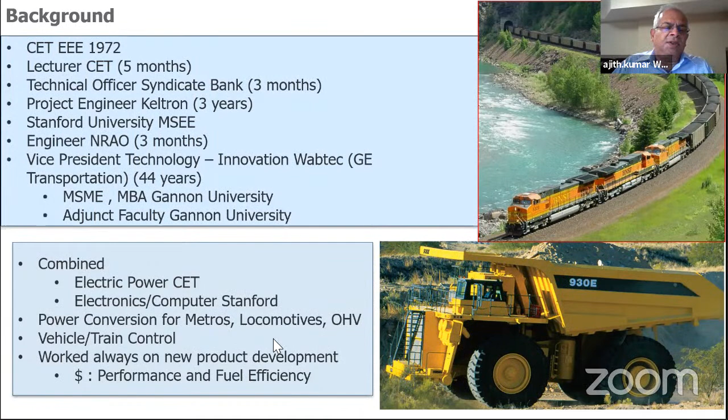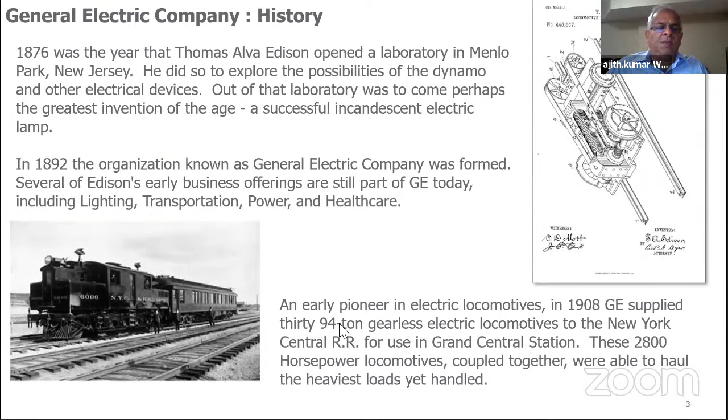Just a brief background on the history of the company. It was started by Thomas Edison more than 100 years back. This is one of his patents, on railroad equipment. You can see it's a lot different from what we know of locomotives today. GE Transportation made diesel locomotives for many, many years and electric locomotives for many, many years. When it started out, it was a very small locomotive. So in the 100 years, it has changed significantly from 1908 compared to 2015.

The weight has gone up. Most of the locomotives in the US, Brazil, and Australia, where it's used for heavy haul, are 33 tons per axle. Compared to that, in India it'll be around 20 to 25—25 is the maximum you'll see around the world, but most heavy haul is 33. So it's meant for going at low speed typically and hauling heavy trains—15,000, 20,000, up to 40,000 ton trains. The speed is limited; typically 70 is high speed actually for a freight locomotive.

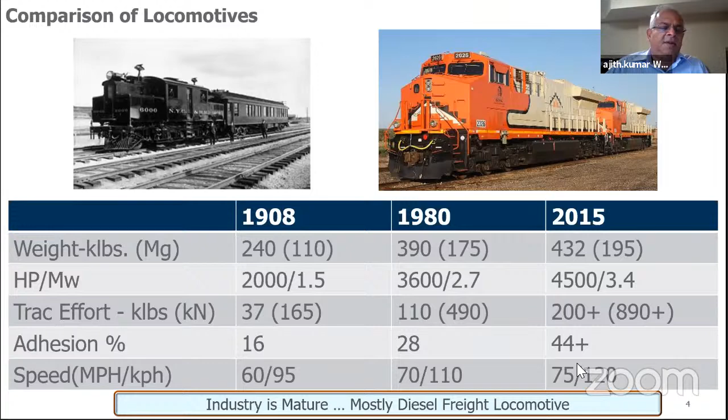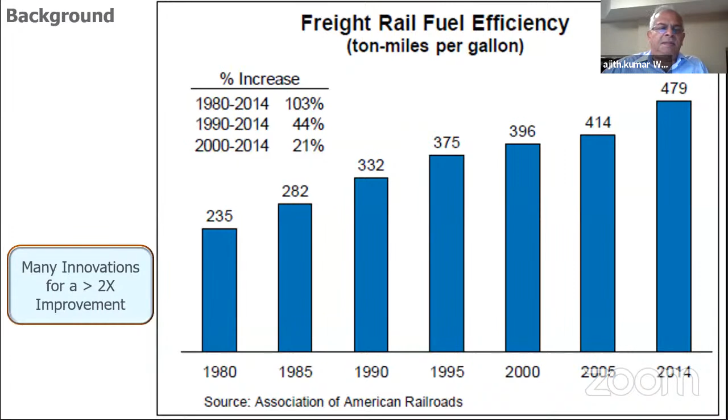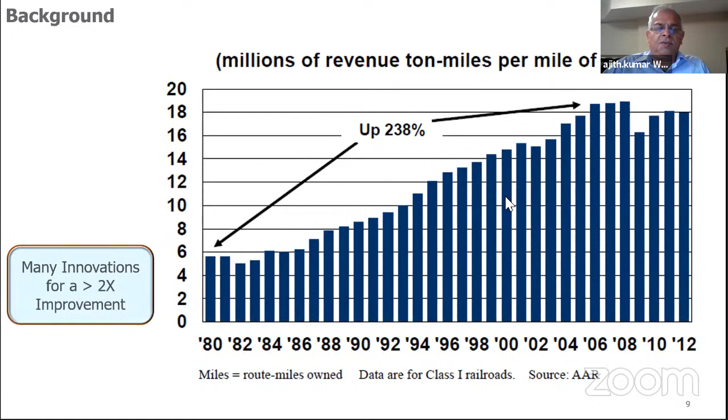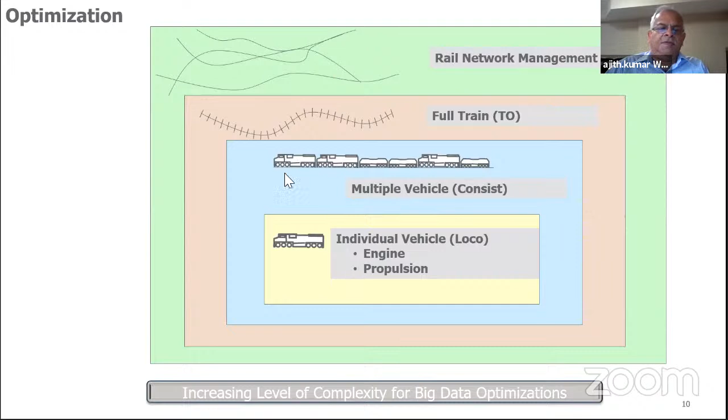For that to happen, there are many things that need to be looked at. You have to look at it from the individual locomotive: what does the engine do, what does the propulsion system do? That's where I started. Then I looked at a typical train with multiple locomotives, where you can optimize things when you have 2 or 3 locomotives. The last one I worked on was the full train itself, which needs to go from point A to B. So far I haven't gone into railroad network management itself, which involves how to dispatch trains, which trains should take priority, where they should meet and pass. I haven't looked into those. So the first three optimizations are where I concentrated mostly.

If you take a look at a locomotive or a train, a typical train is 2,000 to 45,000 tons. That's the typical train I'm used to. The biggest train is about 99,000 tons, which is a test train, not a real operating train. A typical train in the US consists of 3 to 5 locomotives, with a maximum of 7. Trains are 1 to 3 kilometers long.

This is a key metric: 0.3 to 3 kilowatts per ton. What that means is if you had a car weighing 1 ton, you're allowed to use a 300 watt drill to drive that car. That's the amount of power the train has per ton, which is very small, and that's the main reason it takes forever to accelerate or slow down a heavy haul train.

In addition, there are a lot of terrain related issues, like undulating terrain, tunnels, and curved terrain. In a tunnel like this one, the temperature goes as high as 140 to 150 degrees centigrade, so the train needs to operate through there.

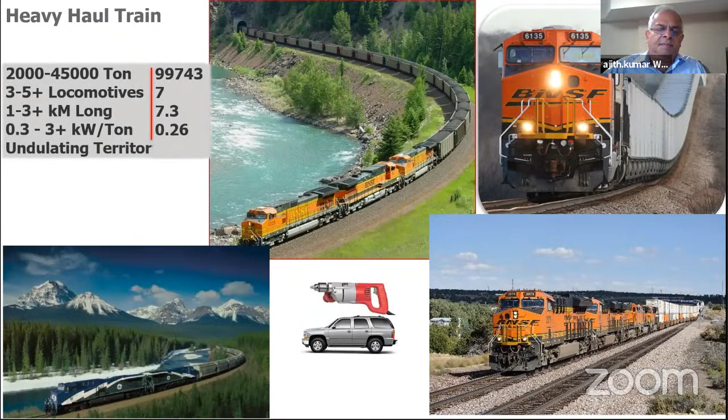These locomotives have a force about 3 to 3.5 times that of a GE jet engine at starting. At high speed it doesn't have that kind of force, but at starting it's about 3 times that of a jet engine. You can compare it with the biggest passenger car or an SUV, and look at the comparisons. It's about the size or weight of 80 full-size SUVs.

A typical locomotive consists of an engine, generally in the middle due to weight distribution, with the operator at the front, along with lots of equipment for crashworthiness. This ensures that when a train hits something, it rides on top rather than going under it, so there is lots of equipment to make sure the train does not get crushed by something else.

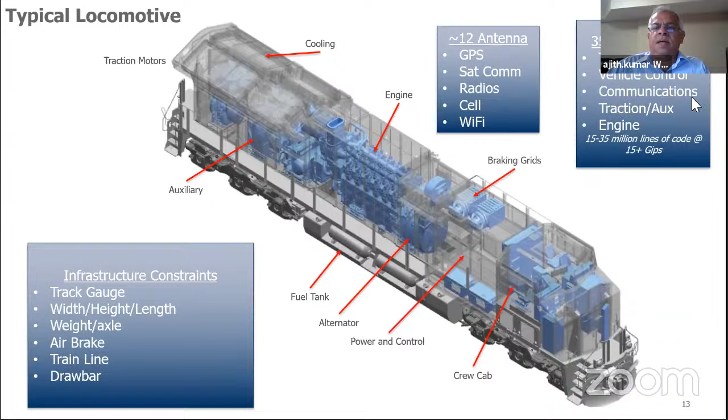And of course, radiators and controls. I won't go through all of it, but from an electronics perspective, a typical locomotive today has about 12 to 15 antennas for GPS, satellite communications, radios, cell phones, and Wi-Fi. A locomotive is always in communication with the central dispatch. For example, most GE locomotives communicate with the GE Remote Monitoring and Diagnostic Center to continuously monitor its health. There are about 35 computers, which is unbelievable, running different things from traction. That's where my expertise is, in traction mostly.

The constraint is set by tradition, meaning the distance between the rails is already fixed. In most places the tunnels are also fixed, so you cannot increase the size of a locomotive. So the space available differs by country but is limited.

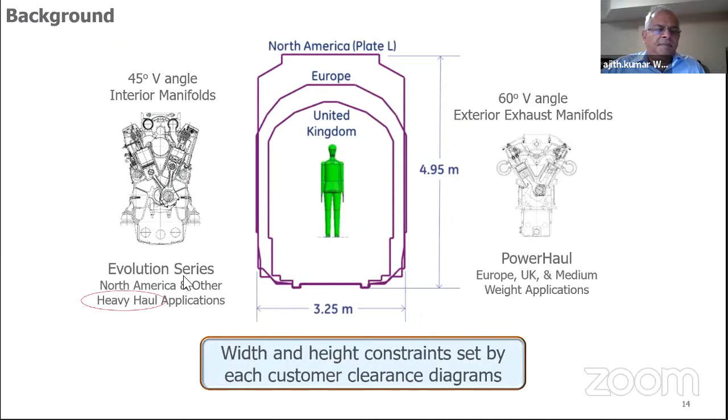I'm going to skip some charts, but when I started working on it, most locomotives, except passenger and electric locomotives, used DC propulsion equipment, which had lots of issues. One was failures due to water ingestion or snow. The other was that commutators took up a lot of space, and the most premium space in a locomotive is between the wheels because the track gauge is already fixed. So my first attempt was to take the commutator out of there and move it upstairs above the platform to get more space for power.

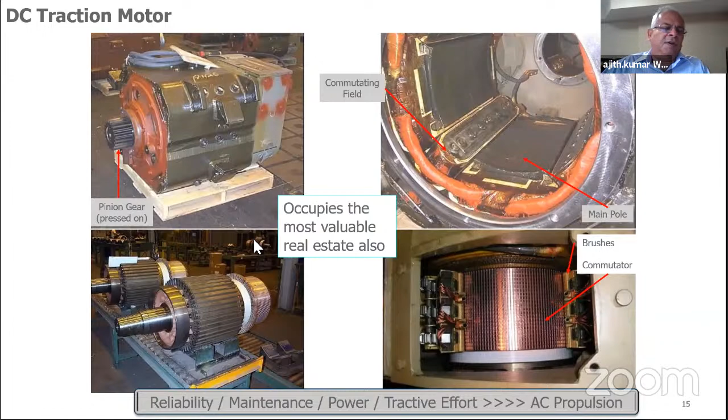And that is what's shown here. It's an AC propulsion system, which takes the power from the engine through an alternator, through a diode rectifier, through 6 traction inverters to each of the traction motors. So now the commutator is gone from underneath the platform to above the platform, which gives you a little more space for the traction motor, meaning you can put more torque, more tractive effort, or more horsepower into the rail.

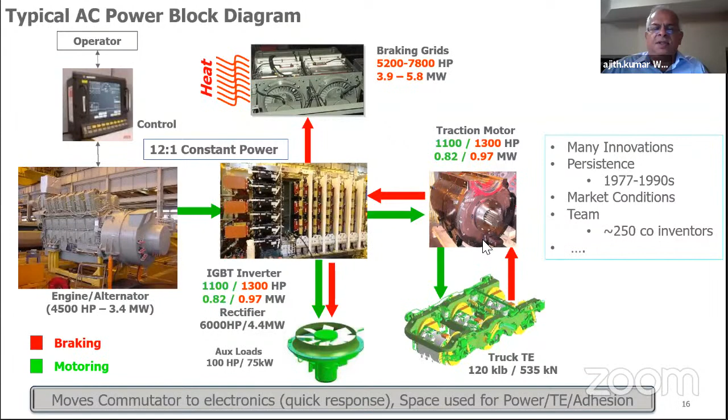So that's where I concentrated most of my time from 1977 to the 1990s. About 20 years I worked on it to get it to this shape.

So there are many things I can talk about, but I'll cover a couple of examples, like hybridization or energy recovery, some examples of how to increase the pulling power of the locomotive, and trip optimizer, which was meant for fuel efficiency, stuff like that.

A typical locomotive consumes about 4,000 liters per day, or a train will consume about 20,000 liters a day. US railroads consume about 14 billion liters per year. So these are big numbers, so any small improvement in fuel efficiency has a significant benefit to the bottom line of these railroads.

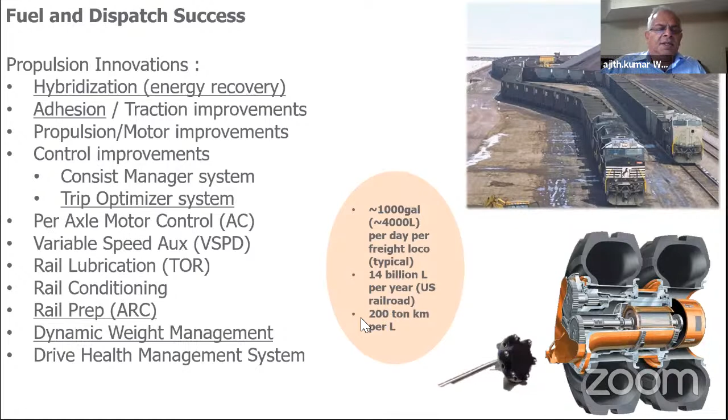So the first step was to increase the pulling capability. If you can increase the pulling capability, that means you can add more cars to the train, which means more money to the railroad. We have all seen the ideal friction coefficient, the rolling friction and static friction.

The static friction of steel on steel is about 0.65, but a train does not see that kind of friction due to various factors. Most of them you cannot control - meaning the manufacturer of the locomotive cannot control. It's all due to material, geometry, curvature of the railroad itself.

And there's always weather-related issues - moisture and ice, contamination, corrosion, leaves, oil, millipedes. During millipede infestation, it's slick. Most of the railroads are extremely slick, with no adhesion left.

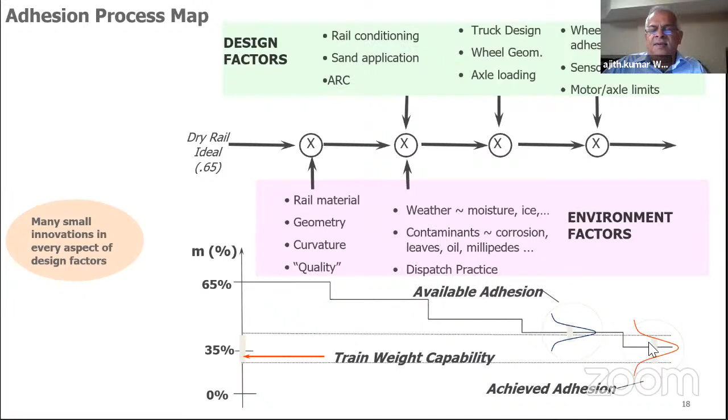And how the railroads practice their dispatch - whether they put all the locomotives in the front, the middle, or somewhere in between. So the things you can control are the ones on top. I'll talk about a couple of things, but I won't go over all of it. By the time you account for the 65% adhesion, if you can get 35%, that'll be extremely good.

And when we started looking at it, once computers came into existence, you could look at the creep. Creep is when the wheel goes at a slightly higher speed than the locomotive. A very, very slight increase in speed is all it takes to convert from static friction to rolling friction, so you lose a significant amount if you increase the speed by even a few milli-RPM.

So with computers, you can look at the speed of the locomotive and compare it with the speed of the wheel, and look at that minute difference in speed. That difference is what's used to control it to the peak of the friction force.

In school, we studied static friction and rolling friction, but it's classified as stationary or moving. But in reality, when the locomotive itself is moving, that analogy doesn't work. So we look at creep - if you are at 1 or 2% creep at high adhesion, you've lost the game.

So the objective is to find out what speed the wheel should be run at for a given locomotive speed. If the locomotive is going at 20 kilometers per hour, the wheel should be going at, say, 20.1. And what my control does is slightly adjust that speed.

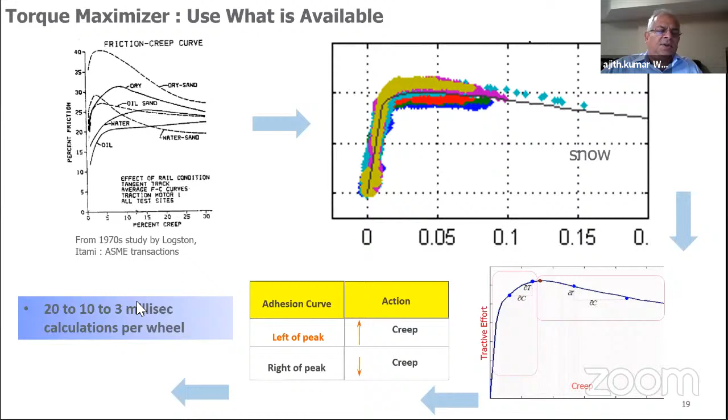So now almost every railroad uses that technique to maximize torque. And we are in the process of going even further, because the suspension of the wheel, even though we may increase torque due to the spring and mass, doesn't exactly represent the speed of the wheel. So there are techniques being incorporated using Kalman filters and observers to look at about 300 characteristics per second on the wheel itself, to minutely control the speed of the creep and increase the adhesion.

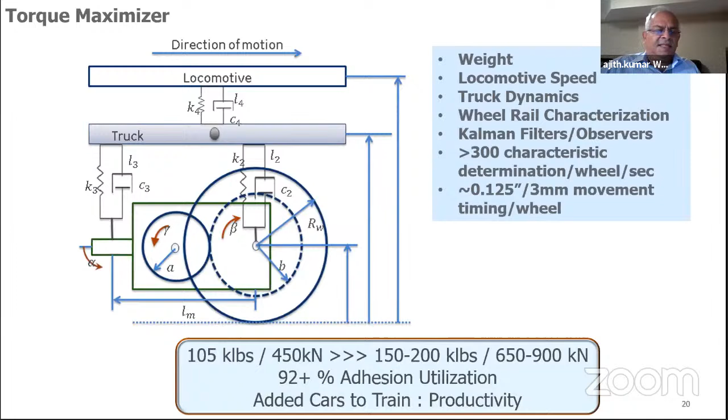So right now we make about 93% of the available adhesion under the rail, so there's 7% more left to get. The most important information you need for this control is the speed of the wheel and the speed of the locomotive itself, and there are a lot of times that is the most difficult thing to do.

GPS never tells you what the speed of anything is right now. It always tells you what the speed used to be a few seconds back, and that's too late. So most equipment does not supply the speed at the current state. There's always a transport lag.

We have looked at inertial navigation systems, which are used in missiles and other applications, but none of them provide you the speed at this instant in time. So the technique used now is that periodically one of the wheel's tractive effort is dropped, and we look at the wheel slip characteristics to figure out the locomotive speed.

Since there is no operator on these locomotives, it is crucial that we know the speed exactly. Here is an example where one of the locomotives didn't know the speed. It thought the locomotive was moving, applied adhesion, and you can see the shape of the rail after that.

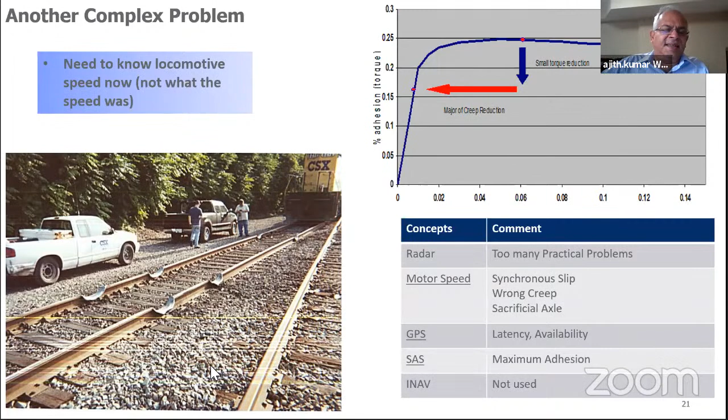It's difficult to condense all the processes I've worked on, so I'll take two examples. For some of them I have listed the patent number, so you can go and study it if anyone is interested. Most of the ones I'm going to talk about are simple, almost anybody can understand them.

The first one, as I said, is a 200-year-old problem. And if it's a problem, it's an opportunity also. So the problem is how to improve the friction between the wheel and the rail.

If you look at, for example, when you want to paint something or clean a surface before painting, that's where I started. People do sandblasting before painting to clean the surface. So the question was, why couldn't I sandblast the rail before the locomotive gets there?

So we looked at sand, we looked at silica. We took silica and pumped it at 200 kilometers per hour to the rail, just at the wheel-rail interface, with a nozzle like this, injecting silica to improve the adhesion.

We looked at walnut shells, so we put lots of walnut shells and pumped them in between. We also looked at glass beads. Today, most railroads use sand. Sand has an issue in the sense that if you ingest it, it can cause silicosis. So we are in the process of removing as much sand as possible, but most railroads still consume a huge amount of sand to improve adhesion.

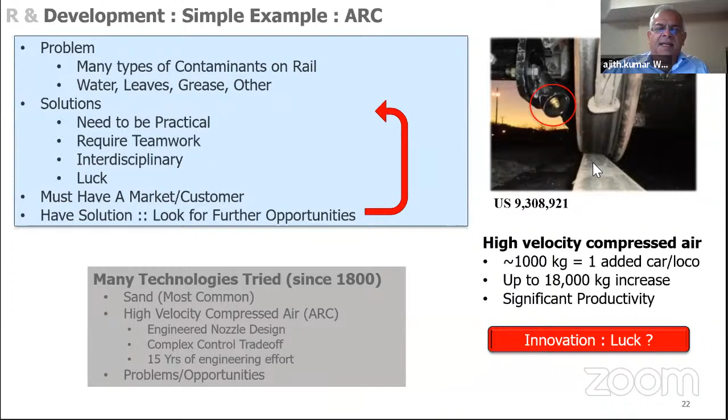In some countries, like Australia, they have used this for millipede blasting. During certain millipede infestation times, there will be lots of millipedes on the track, so the air will throw them off.

Now I want to talk about one which failed. The first one I showed was a concept which succeeded; there's another one which failed. The concept was to improve the pulling power of the train. One option, as I talked about, is to increase the adhesion in the front of the train. The other is to decrease the adhesion at the back of the train so the cars don't need as much friction.

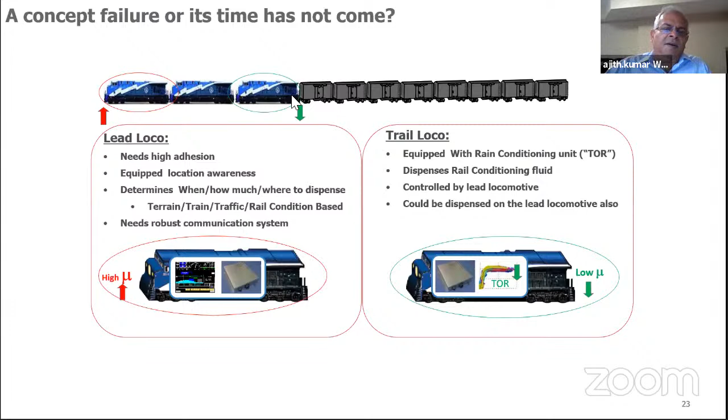So you put sand or compressed air in the front, and drops of water or ethylene glycol or any friction-reducing material behind the locomotive, which will evaporate so that the pulling required for each car is reduced. That did not succeed for commercial reasons. Technically it worked, but for commercial reasons it wouldn't, because you need to make sure that whatever you put in evaporates before the next train comes, otherwise it loses its adhesion. So for those reasons, and the amount of material that would need to be dispatched, it didn't succeed.

Another simple concept which succeeded quite well is the cost of the locomotive also matters for most of the railroads for their return on investments. So one of the concepts was to remove out of the 6 wheels, can I remove 2 of the traction motors or 2 of the propulsion systems and make the same amount of power?

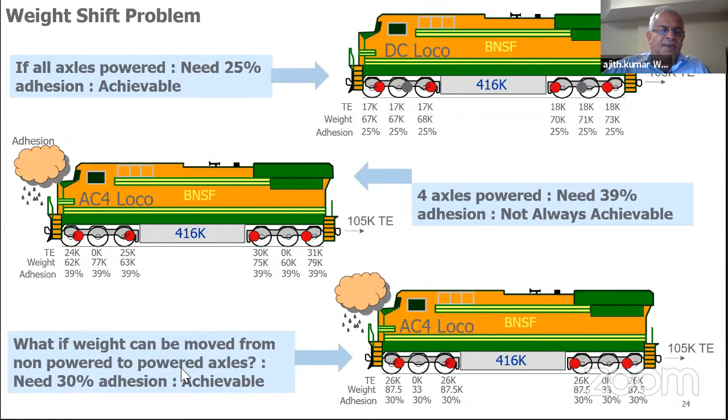As we said, adhesion is the reason why the trains don't have enough pulling capability. So the first concept in adhesion is the weight you apply on the track. The question was, can I increase the weight of the axle when I wanted it? So if I can crank this axle up and compress the spring, that means the unpowered axle's weight will be transferred to the powered axles. It's a very simple equipment, and it made enough tractive effort to sell about 1,500 locomotives.

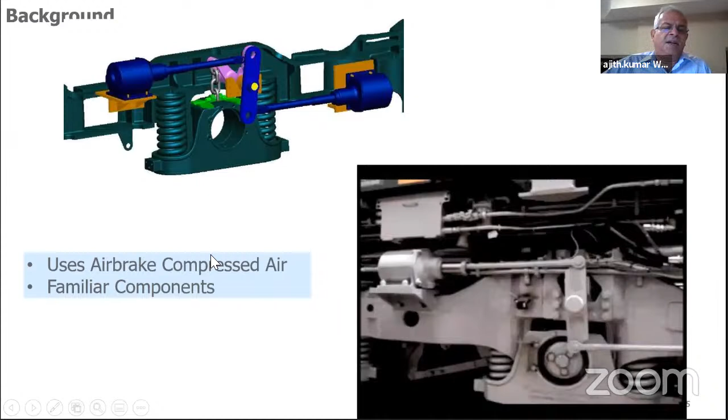So I'm going to change subjects slightly, go from locomotives to trucks. We talked about a locomotive, it's about 3.5 times the pulling capability of a jet engine. Now, if you look at a truck...

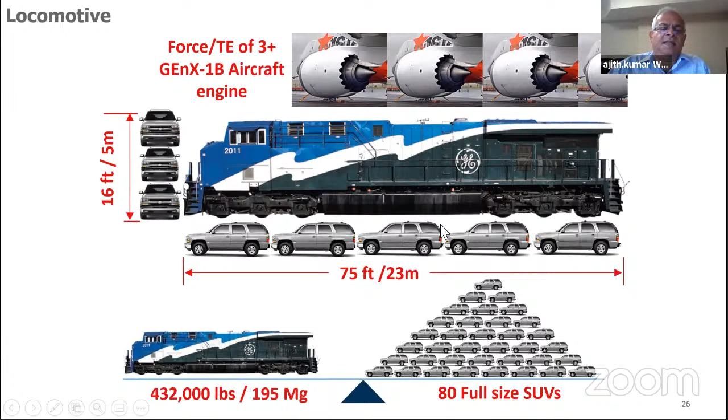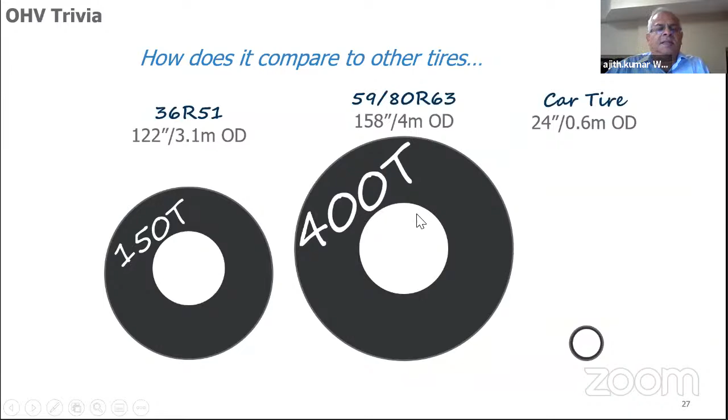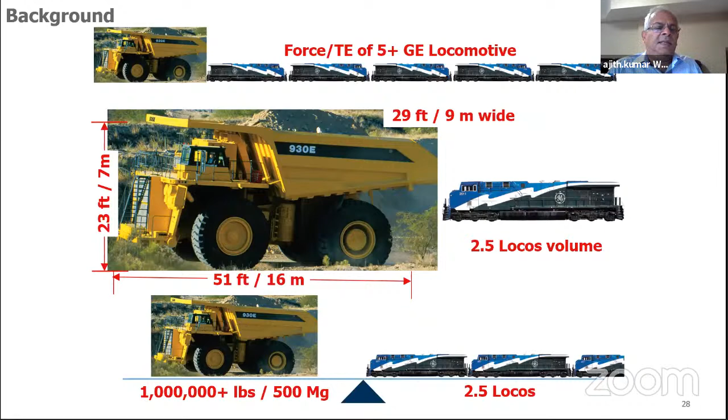I'll show you a video. I don't know if it'll work or not. If it works, we'll...

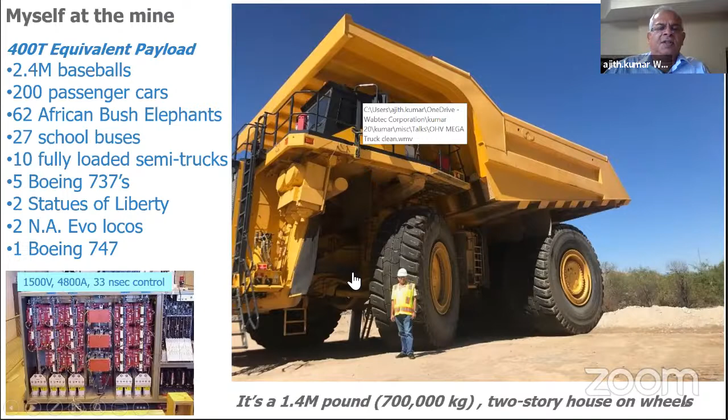So I don't know if you could hear or not. There are hundreds of them right now in the world. When the video was taken, there were a few. It's fun to drive.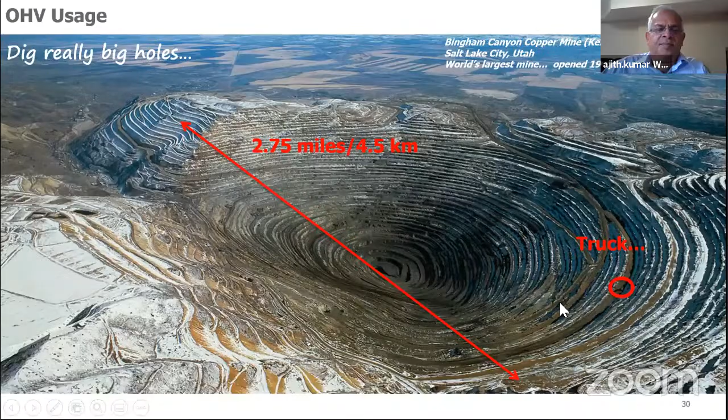And when you go to a mine, there are a lot of, what should I say, safety concerns. They overload. They put hot material on the trucks, so they should be able to operate from minus 55 to plus 55 C with many, many toxic substances around it.

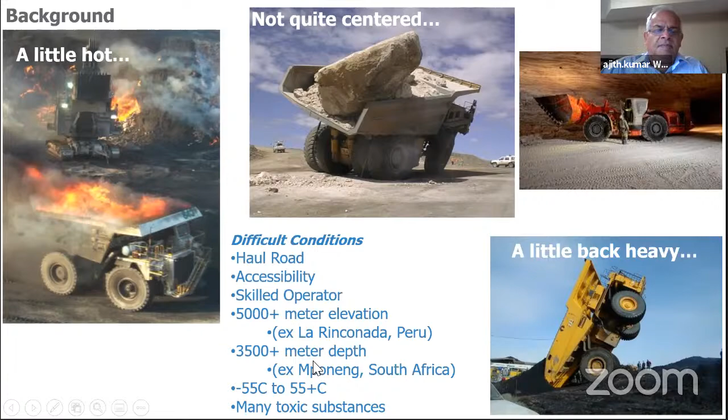Okay, last year's my effort has been to increase the capability of pulling heavier, or higher productivity. In a mine, the productivity is measured in terms of how many tons of ore can I move through that little road. The little road is not little, but 2 trucks will fit. So how can I increase the tonnage being hauled through that road?

The issue is going to be always the diesel engine, which is on board, is the issue. So the concept is to electrify the grade, the constant grade portion. The mine is always moving, because as you dig and get ore, the head moves further out. So the mine is never stationary, it keeps moving. But still, there's a significant portion of the road which doesn't move. So that section, where there's a big grade, can I electrify it, which means you can increase the speed of the vehicle, which means you can get more productivity.

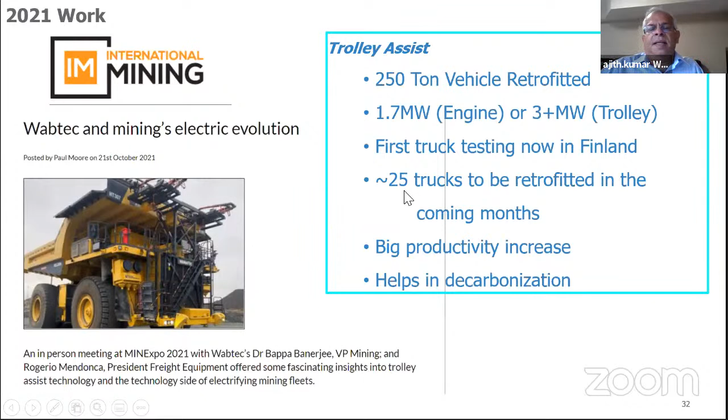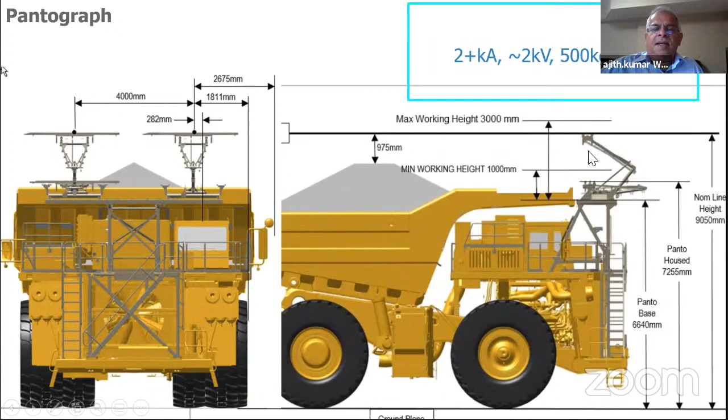So a few weeks back, we had the first truck running in Finland. It's a platinum mine, and here is what it looks like. It uses 2 pantographs because these are rubber-tired vehicles, and you cannot apply a single pantograph, and you cannot apply 25 kV kind of voltages. So you have to find the right voltage, a couple of pantographs. And so when you get to the big hill, this truck will connect to the pantograph, to the catenary, and run.

These equipments are not small. These are 500 kilogram pantographs.

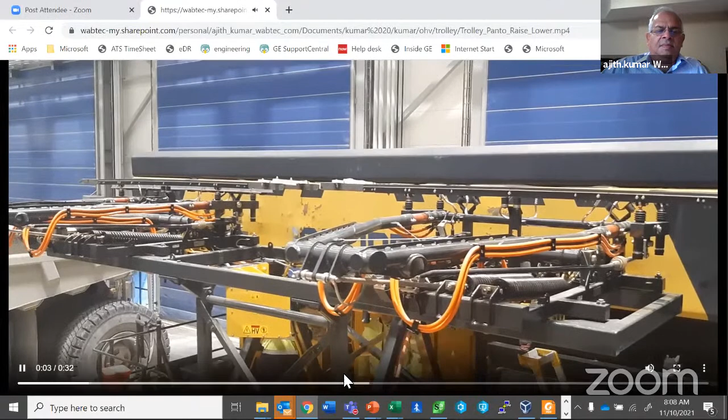This has started running starting last month, about a month ago. So the productivity of that mine is going to go up significantly, because you can go through that grade at about twice the speed.

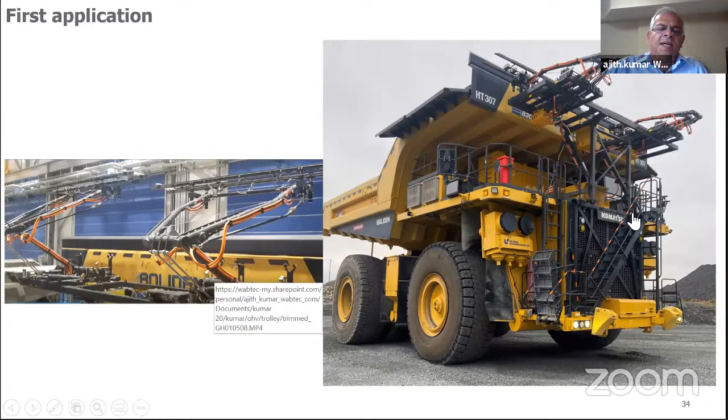Going to switch subjects again. It's not the locomotive or the truck that matters, it's a train that matters, or the whole conveyor belt that matters. So the objective is to move freight from point A to B with the least amount of fuel or energy consumed. So I started working on when hybrid cars were coming out in 1999. I said, okay, I could do the same thing. A train like this produces about 50 megawatts of power during braking. That's generally wasted either as heat in the locomotive or heat in the wheels. So if you can even capture a small, minute fraction of it, that's a significant fuel reduction.

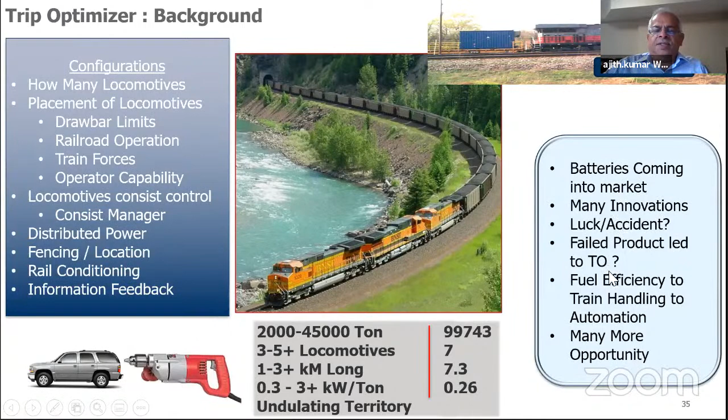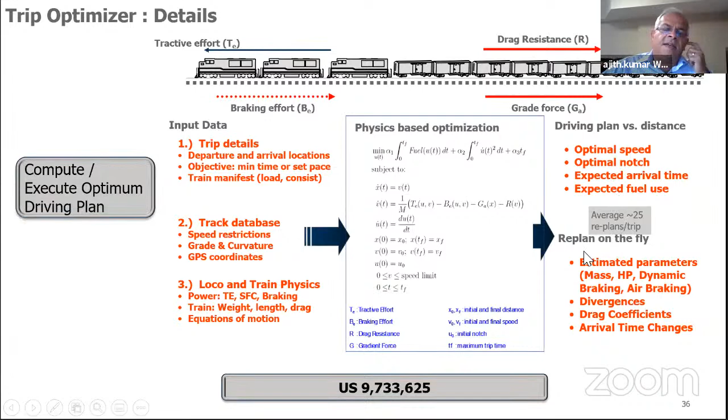So the physics is, I want to minimize fuel subject to certain conditions and execute that plan. Generate a plan on board, then execute to that plan. And that made a significant reduction in fuel, about 10% fuel reduction.

So there are many algorithms which run on that locomotive continuously. Every second it calculates what the forces, the entire forces on the train are, what tractive effort should be applied by each of the locomotives. For example, in a train, typically the front locomotives may be in motoring, the middle may be in braking, and the back may be in motoring. You'll see many times that operators have a hard time controlling it because this locomotive may be a kilometer away, this may be 2-3 kilometers away.

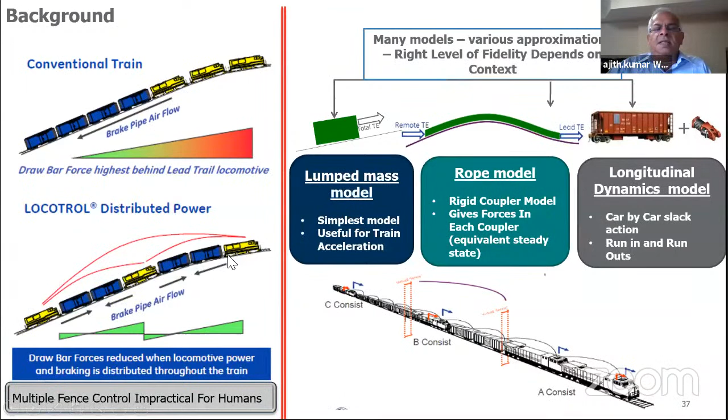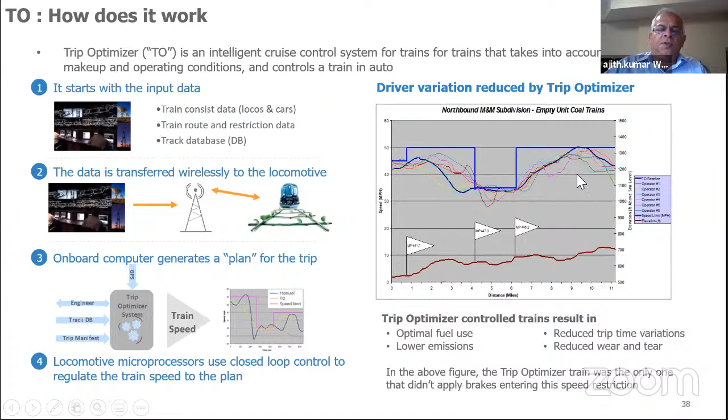So depending on the terrain, the operator needs to remember what he passed about a kilometer back, was it going up or down, and what's the tonnage of the cars. Based on that, they need to run different operations at different positions on the train. Nowadays on these kind of trains, when the operator pushes a button, the railroad will transmit to GE what kind of material is being hauled, what's the weight, tonnage, length, and we'll compute the best profile to run from point A to B and execute to that plan.

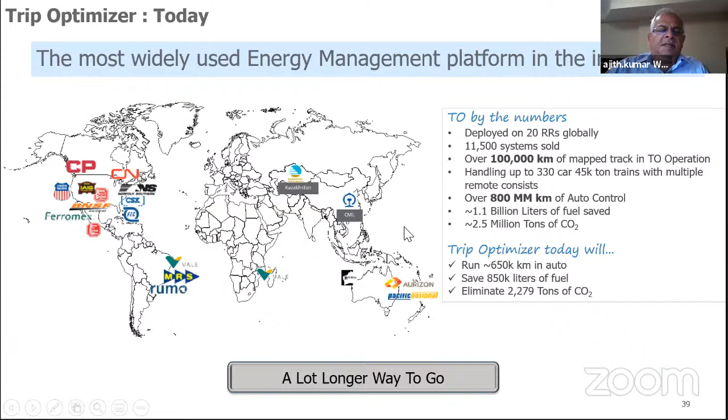And it's used in many, many countries right now. Something like 11,500 systems were sold worldwide. I don't think it's running in India, and I don't think it is running elsewhere yet. It saves a significant amount of fuel and therefore reduces the emissions. There's a lot longer way to go, but that's what we have right now.

The last subject I want to talk about is energy storage. I started out using NiCad batteries. That was the big thing at that time, 2002. Did not work, mostly because even today the batteries are not economically suitable. It does not save enough money to warrant the investment. NiCad was at that time the leading technology. A few years later, it became nickel metal hydride. Then a little later, it became sodium nickel chloride. Now it's lithium ion. Lithium ion is the leading battery.

Even within lithium ion, there are many different techniques: cobalt oxide, manganese oxide, titanate, different chemistries. The current NMC is the leading lithium ion candidate. The other one is LFP, lithium iron phosphate. Lithium iron phosphate is used typically in low energy applications or in cheaper electric cars. NMC, nickel manganese cobalt, is used in high performance cars where you need larger energy storage.

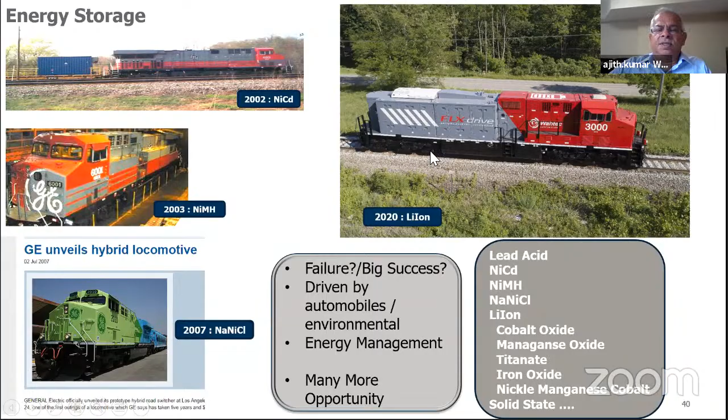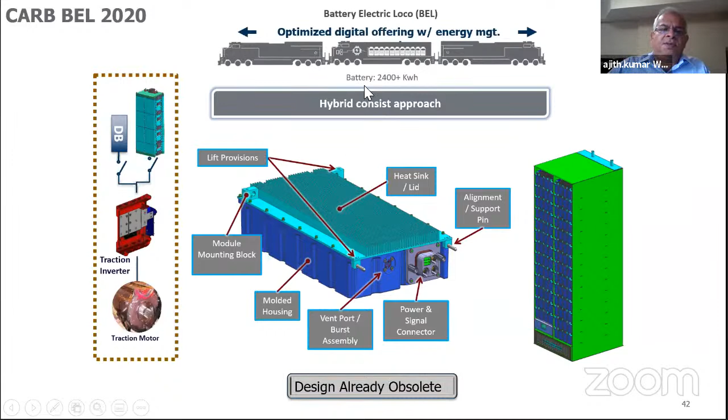So we started out with NMC batteries. These are our batteries, big batteries, putting out 2,400 kilowatt hours. And here is what the train looks like, or inside the train. These are all batteries. This is the first 100% battery operated freight train. And this is me standing in front of it. It looks like, for example, a UPS station or a server room in a computer station.

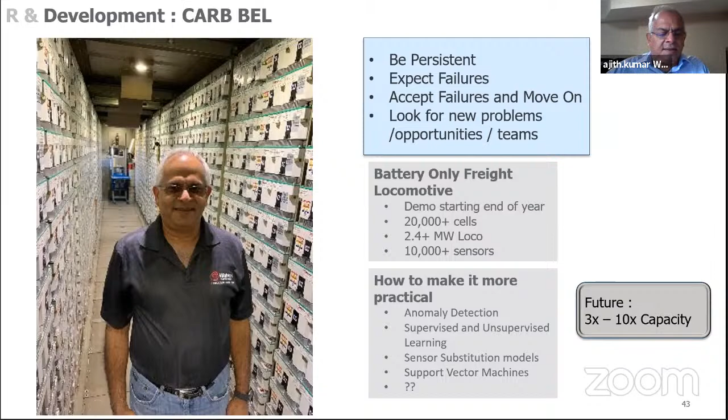I expect within the next few years the capacity to increase 3 to 10 times. As I said, this is a 2 megawatt hour, 2.4 megawatt hour system. A typical diesel tank stores about 75 megawatt hours of energy. That means this is a very, very small amount of energy, even though it consumes almost all the space on the locomotive. So the battery technology needs to go quite a bit higher for it to compete with diesel. But however, that's the first locomotive which ran successfully.

Those who are interested can see that a few months back, Roy Hill ordered the next generation battery-only locomotive. This is going to be 7 megawatt hours, about 3 times more capability than the one we just saw. Last week, CN ordered the second one. I expect within the next 1 or 2 years it's going to be a $1 billion business, or about 10,000 crore rupees annual sales of this locomotive.

You probably know the issues with lithium ion catching fire. It's called a thermal runaway event. Many techniques have been used to minimize the effect of a thermal runaway. It's going to happen because the chemistry of the lithium ion NMC is such that if there's a cell failure, it's going to go to thermal runaway. The objective of my design is to make sure that if a cell goes to thermal runaway, the next cell does not catch fire. Most likely it will be successful. We'll know in a few years.

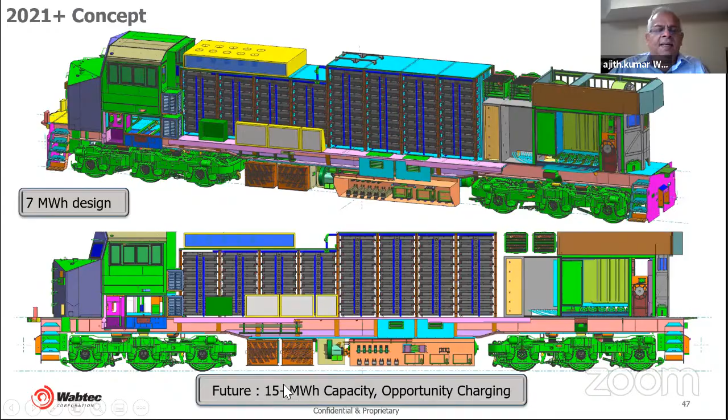So what do I see in the future? That's where I'll stop.

One of the things we are looking into is hydrogen, clean hydrogen fuel cells. We are in the process of making clean hydrogen freight trains, but it's at least 20 years away in my perspective. This is the first prototype, which will be used next year.

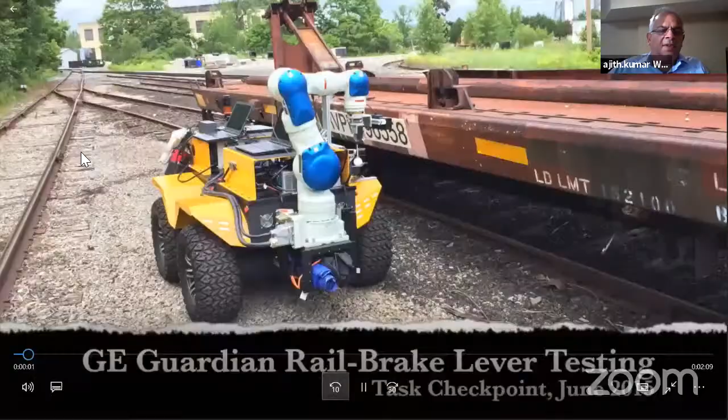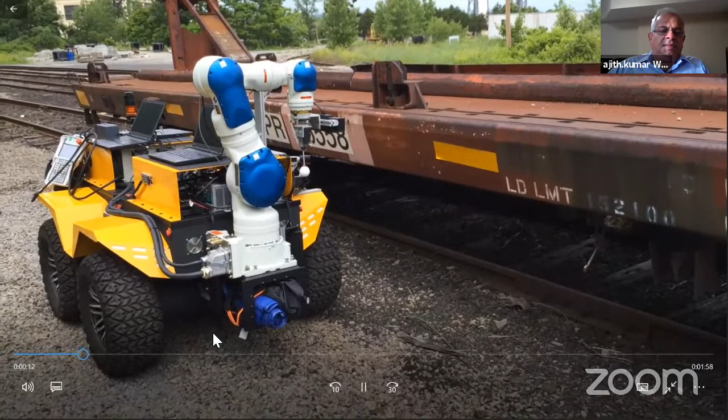The other thing is autonomous vehicle operations. Here is an example of an inspection vehicle or a brake release vehicle. It's an autonomous brake release vehicle. That's a human going in, releasing the brakes. This robot needs to slow down significantly just to find the release. This is the brake lever it needs to find.

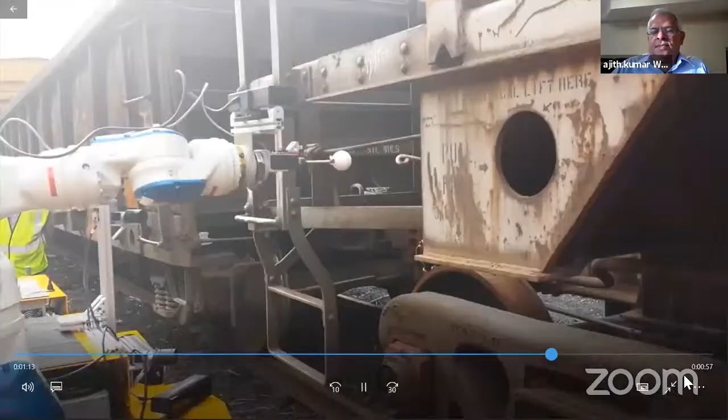We are also looking at sending a drone in front of the train. The drones will be stationed on the roof of the locomotive, and we'll charge it there. There'll be a drone about a mile or two ahead of the train, inspecting the tracks, so the train can be told to stop if there is a problem. Then it'll come back, and another one will go and get charged.

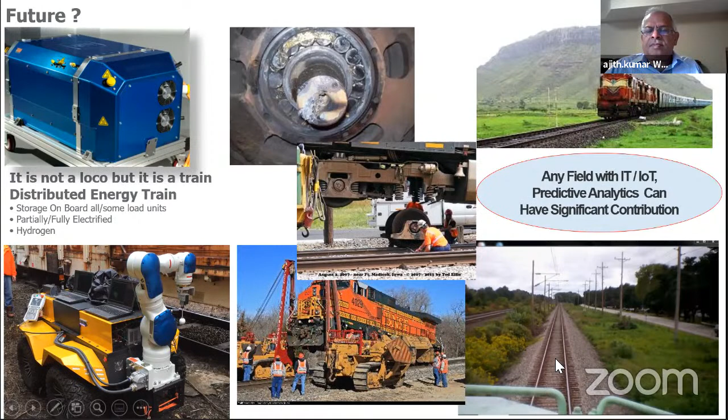And that's there, I'll end this talk. This is the first locomotive built in India with the technologies, most of the technologies I described. I'll stop here.